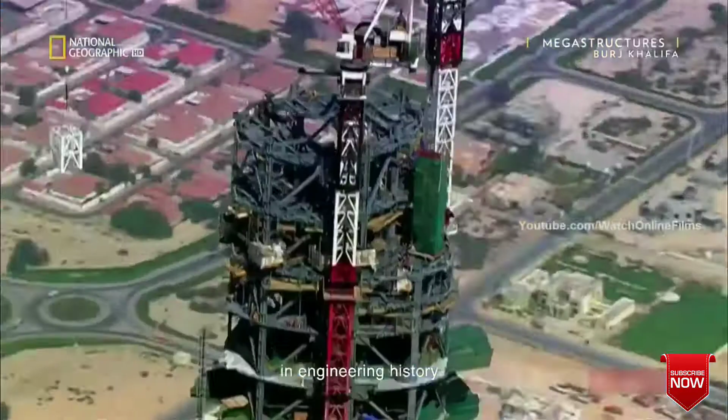The Burj Khalifa in Dubai is the tallest man-made feature on the face of the planet, and one of the greatest achievements in engineering history. To dream it up took outrageous ambition. To put it together requires nerves of steel. Constructing cranes taller, installing windows higher, and building bigger than ever before.

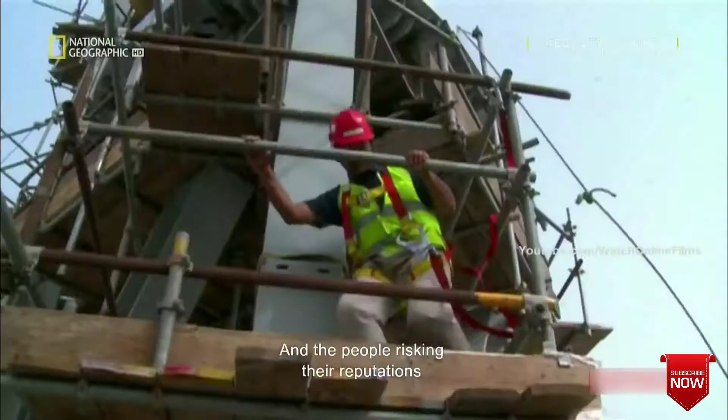The immediate reaction was, "Are you crazy?" As the construction team makes history, they film it themselves. This is the story of one incredible skyscraper, and the people risking their reputations and their lives to build it. All these people that are underneath this are at risk.

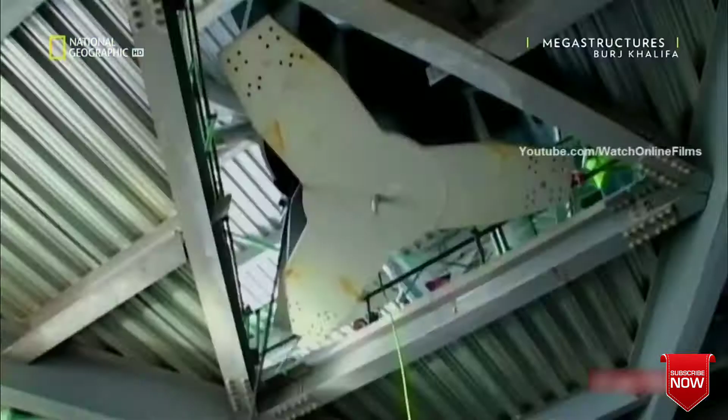In the Middle Eastern Emirate of Dubai stands an architectural giant. At 828 meters high, the Burj Khalifa is the tallest building on Earth. This $1.5 billion tower opened in 2010 with one of the most spectacular fireworks displays ever seen. But this patch of land once looked very different. 6 years earlier, when construction started, it was little more than a barren, parched, and sun-baked desert.

In February 2004, the team breaks ground at the Burj site. When you build this big, speed is of the essence. Time is money. There's so much money invested in these buildings, you have to finish them and start recouping your investment. Construction manager David Bradford is the man responsible for getting the job done on time.

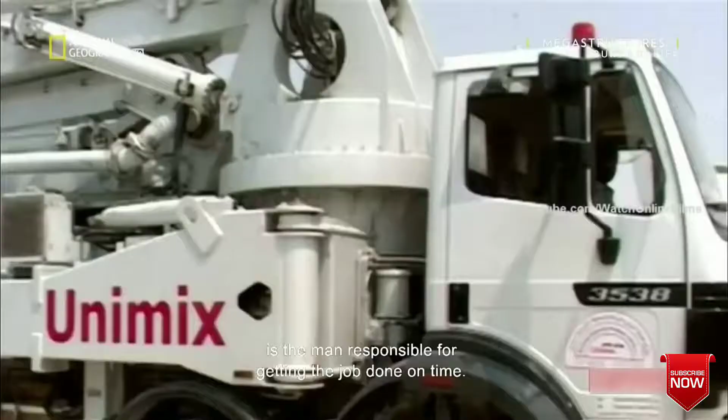So I was ecstatic, just to get a job like this. It's like a dream come true. This is the biggest building in the world. How many people get an opportunity to work on a job like this?

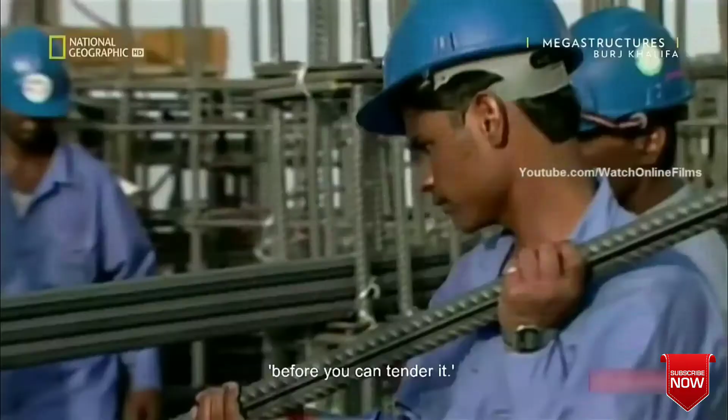But as David starts work, the architects are still finalizing the tower's complex design. The way you build a building like this, you have to fast track it. So you can't wait until you get all the design in place. You'll be sitting there in your office for 3 years trying to get the design finished before you can tender it. With large parts of the structure still on the drawing board, the construction team heads into the sky.

The fastest way to build a tower like the Burj is with reinforced concrete, using a process called jump forming. The team builds molds at the base. They insert steel reinforcement bars and pour in concrete. Then when the concrete sets, the team lifts the molds up to the next level. And the process starts again. Using this system, the building begins growing at the pace of one new floor every week.

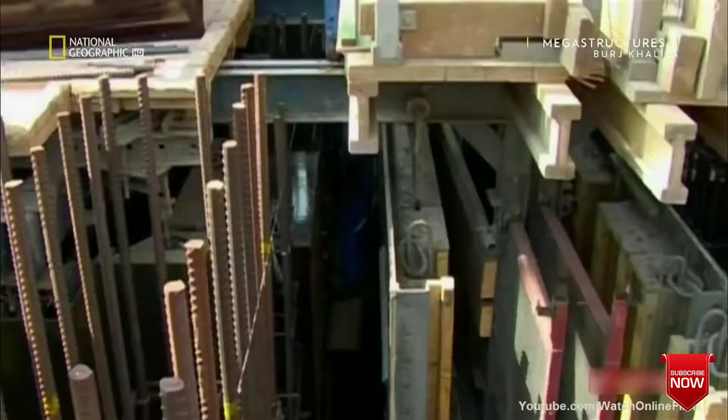When you set the jump form up like this, you put the rebar in, you pour the concrete on the top. After 12 hours, this is 12 hours after you place the concrete, which is liquid, you pull the forms back and you actually climb the hydraulic jump form system up on the concrete that was previously poured. And then that climbs up automatically 4 meters at a time.

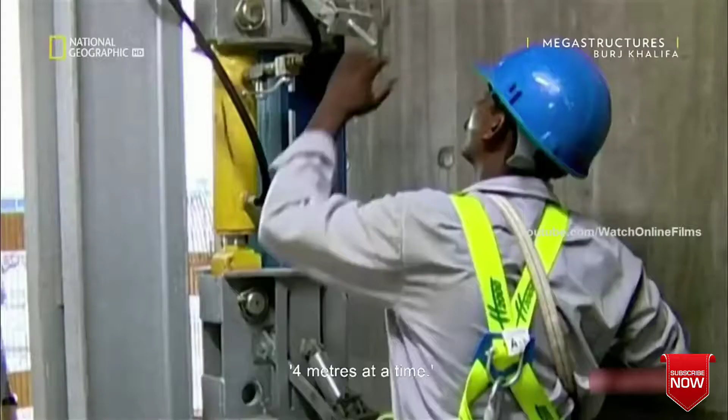The Burj Khalifa is the brainchild of Dubai property developer Emaar. They want to proclaim the city's growing status as a global financial center by building the world's tallest tower. So Emaar has called in one of America's top architecture firms, Skidmore, Owings and Merrill. SOM is based in Chicago, the home of the skyscraper.

As their chief engineer Bill Baker knows, building higher isn't simply a case of taking an old design and adding more floors. The added height creates a unique set of engineering challenges. We're on the 90th floor of the Willis Tower, formerly known as the Sears Tower. As you look out across Chicago skyline, you see almost a sampler of skyscraper technology. Over here is the Aon Center, which was formerly called the Standard Oil Building, and it's a single tube.

Each time architects go taller, they must invent new structural systems. If you look, the predecessor to the Sears Tower, the John Hancock Tower, it's called a braced tube. So you can see the diagonal bracing on each of the four sides ties all those columns together so that it acts as if it's one tube acting together.

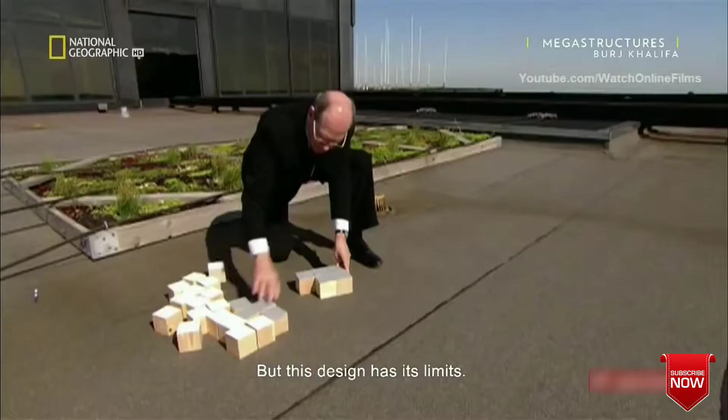But this design has its limits. These 9 tubes are sufficient for a building of this height, at 442 meters, but what if you wanted to go taller? Say you wanted to go up to over 700 meters. Well, you've got to make the footprint bigger. But as we do this, we've gone from something that was 3 wide to something that's 5 wide. So you have a huge amount of area, which is difficult to market. And what's more important is that the space becomes very, very deep.

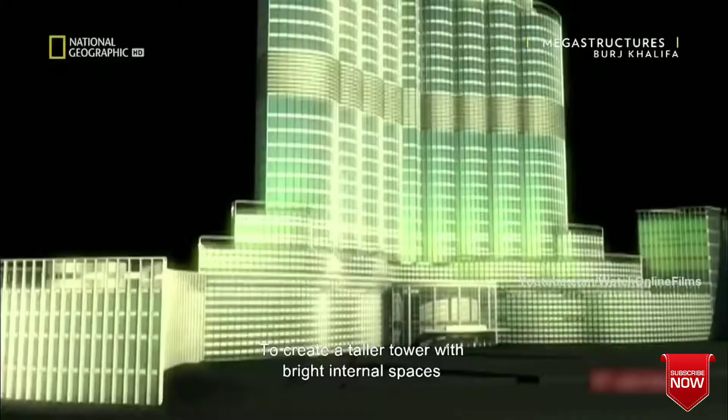In buildings, you want to have views. You want to be able to see out the window. And you can see your occupants would be so far from the views, from the skin, as to render the building unusable. To create a taller tower with bright internal spaces, Bill and his team devise a new structural system.

The structural system we use for the Burj Khalifa is the buttressed core. Now the core is the center hexagon in the middle of the building, and that's what's used to resist the twisting forces on the building, okay? But it's much too slender to go to such great heights. So it needs to be buttressed. Now the buttresses are the 3 wings that come off.

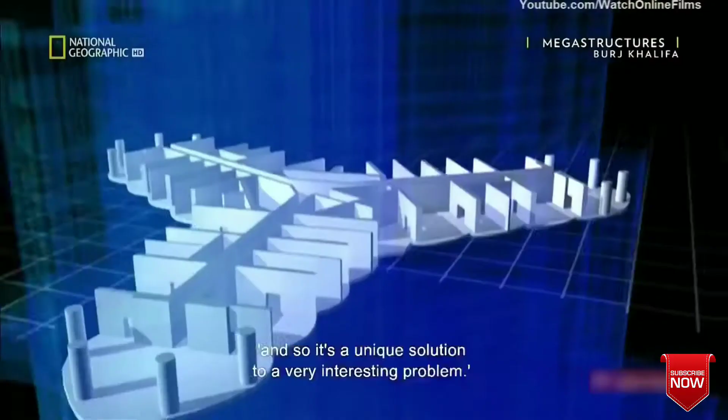It consists of these walls that go down the corridors. So you can see how this core has been buttressed in 3 directions. That's why the structure goes on the wings. To my knowledge, it's never been done anywhere else. And so it's a unique solution to a very interesting problem. With the buttressed core concept, natural light floods the interior.

We've come up with a solution which allows us to go very, very tall, but it's light and airy on the inside. It's as if you're in a 10-story building rather than a 160-story building. In SOM's design, the large tower base helps support the huge weight of steel and concrete. Then, as the building climbs, the buttresses step back in a rising spiral. The team then coats the design in glistening mirrored glass to reflect the desert heat and light.

If you were to compare the Burj to an automobile, you'd be talking about Lamborghinis or Ferraris. It's all about performance, and this building is at the highest level of performance. This quality comes at a price. The building cost was a closely guarded secret. We heard some general figures that were thrown out. We guessed that it was somewhere in the $1.5 billion range, but we weren't privy to a lot of that information. And again, I think the jury's still out.

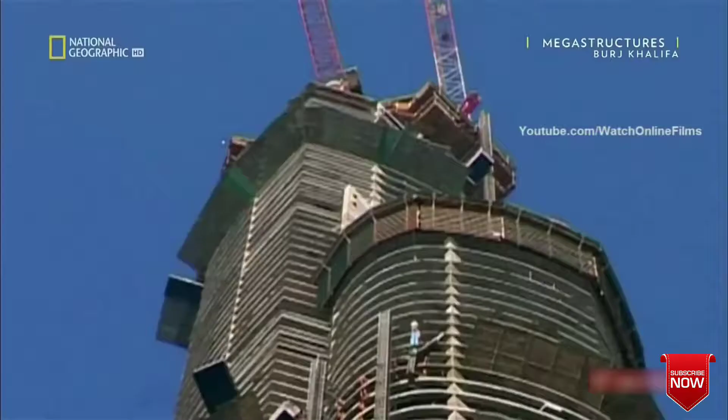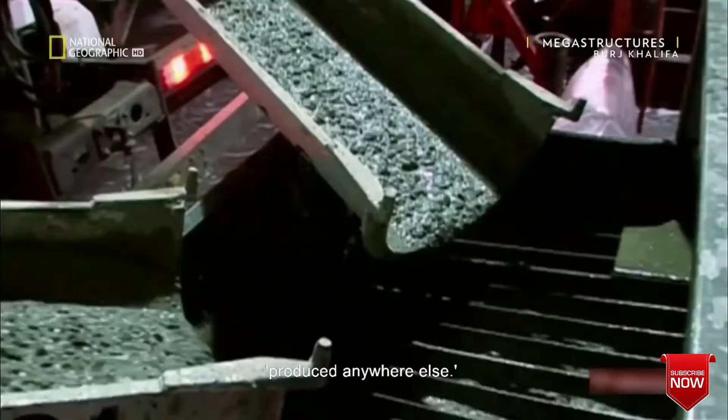Making this billion-dollar design a reality will be a mammoth task. The most basic construction materials must be super-powered. Strength of concrete was key here, absolutely key. And we produced concrete here that nobody produced anywhere else. The team uses over 25 separate ingredients to create concrete that stays liquid as it's pumped up the building and then turns solid extremely fast.

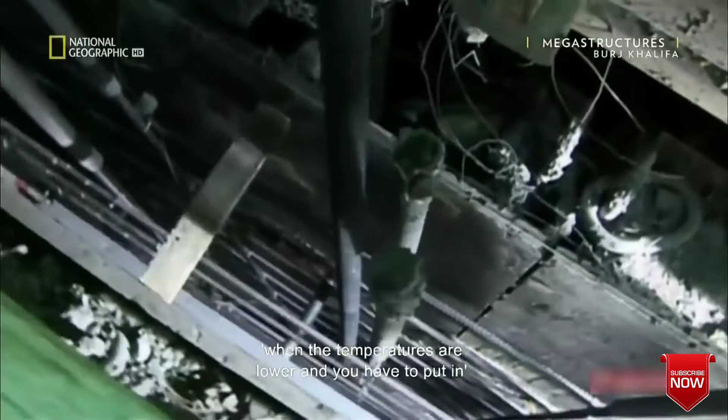But getting this special mix to set is a massive challenge in Dubai, with temperatures rising over 45 degrees Celsius. If the concrete is too hot, it'll set instantaneously and you can't even place it. You have to pour at night when the temperatures are lower, and you have to put in ice and chilled water in the concrete mix.

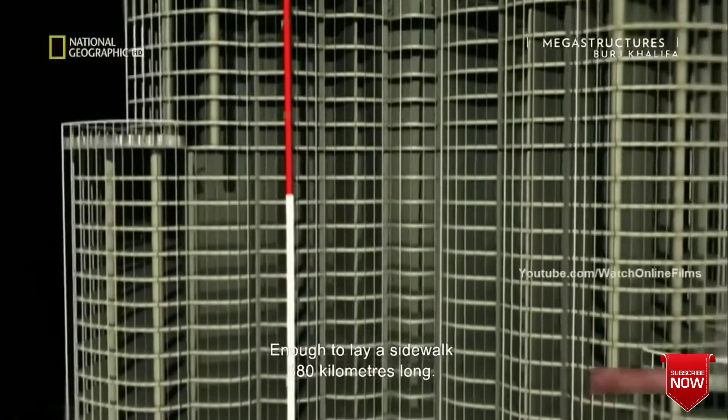To lift this mix up the building, the construction team uses 3 of the world's most powerful concrete pumps. Over 32 months, the pumps deliver 165,000 cubic meters of concrete, enough to lay a sidewalk 880 kilometers long. The team will then top the concrete tower with structural steel. And as this building rockets out of the desert, men and machinery will go to greater heights than ever seen before. Okay, over the edge.

The city of Dubai is home to 17 of the 100 highest skyscrapers on Earth. But they're about to be dwarfed by a monster. As construction accelerates, the Burj Khalifa is now growing a new floor every 3 days. The idea is keep the ball rolling, never stop construction at any point in the project until you're finished. The building's handed over, that's it. That's when you can relax.

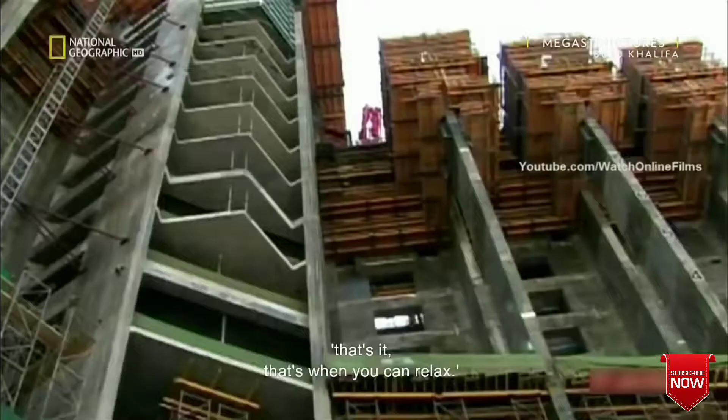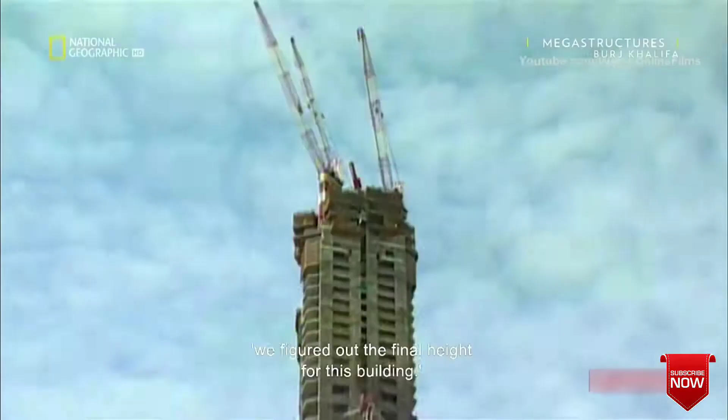While this process continues, there is still one fundamental detail to resolve. The architects still haven't decided on the building's final height. Usually minor things change, and on this one, major things changed. The foundations went in way before we figured out the final height of this building. It's an issue that has to be cleared up fast. The landmark to beat is the 508-meter tall Taipei 101 in Taiwan. SOM's original design is just 10 meters higher.

And one of the reasons why we did that is we didn't want to promise more than we knew we could deliver. But the architects soon calculate that the structure is so strong it could stand over 300 meters taller. We kept on making the building taller and taller. And so it actually grew to about 725 meters there for a while. It stayed there for a while, then eventually grew up to around 800 meters and finally ended up at the 828 meter height.

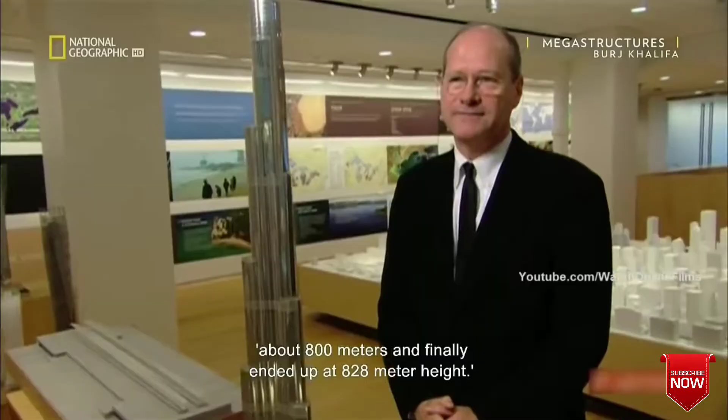When complete, the Burj will stand 828 meters above the ground. The question is, are the foundations strong enough to hold it up? Early on in construction, analysis of the ground under the site highlighted a problem.

It's not like when I worked in New York City, you get good granite there. You go down 4 or 5 meters, you're into good granite, and that's what you sit your foundation on, the granite itself. Here the ground is a top layer of sand, 3 or 4 meters of sand, and you get into weak sandstones, weak limestones, nothing very good.

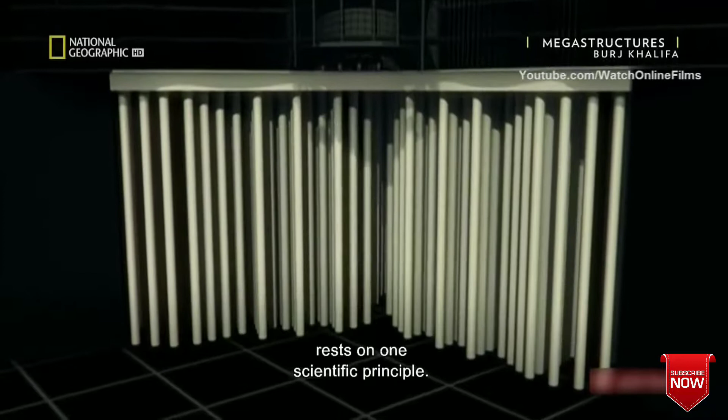But science provides the answer. The future of the Burj Khalifa and its entire colossal weight rests on one scientific principle: friction. There's basically 2 methods in piling. One is end-bearing piles, which is you put the pile directly on the hard rock. That's what can sustain the load.

But here we went with skin friction piles, where the weight of the tower is carried on the friction of the pile, the side of the pile. The foundations of the Burj rely on the super strong grip created between the ground and the sides of each pile.

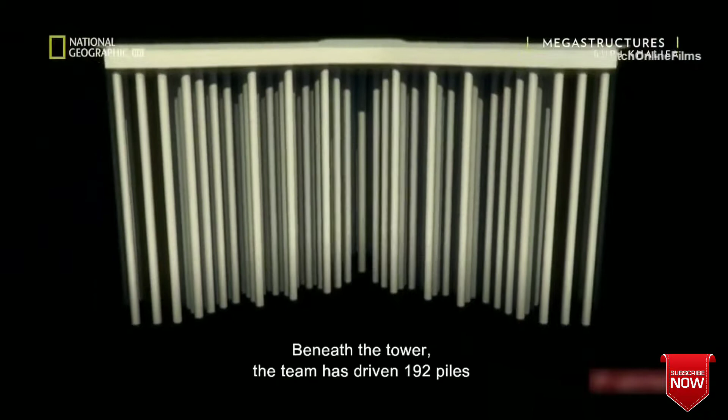Beneath the tower, the team has driven 192 piles to a depth of 50 meters to support a 3.7 meter thick raft of solid concrete. These foundations must hold up a building that weighs over 500,000 tons. The numbers are so big that the team has to allow for a small degree of settling in the design.

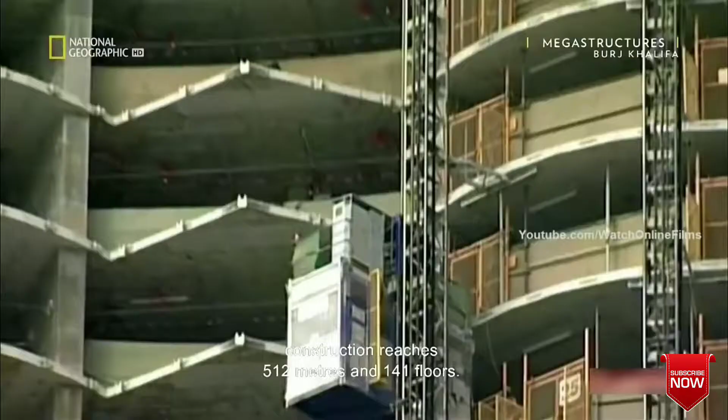Once we evaluate all the total load of the building, live and dead loads, we expect the foundations to settle about 75 millimeters. But the foundations should hold. 3 years after breaking ground, construction reaches 512 meters and 141 floors. The Burj is now the tallest building on Earth.

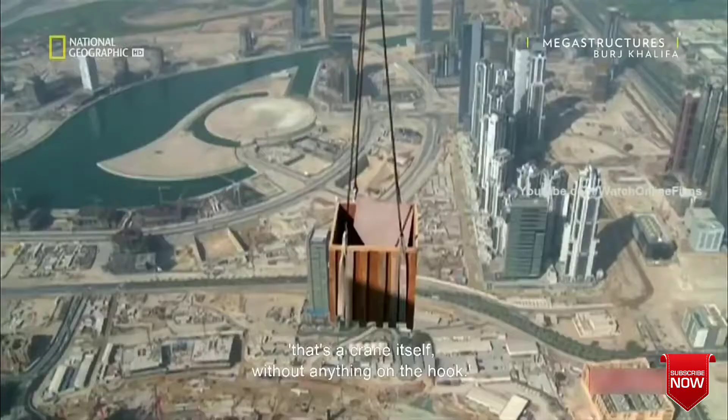To help move materials, the team hires 3 of the biggest construction cranes in the world. I mean, these are very specialist cranes, actually huge. They weigh 120 tons dead weight. That's the crane itself, without anything on the hook. The high wire act of installing the cranes falls to a special group of men. Sharif and his team of crane riggers.

These men come from every part of the globe, and many speak different languages. But they have 2 things in common: a strong nerve and an incredible head for heights. Their task is to erect the cranes and keep them working smoothly. All without a single slip. They never ever lost sight of the ground and the edge of the building, and it was amazing that these people were so comfortable.

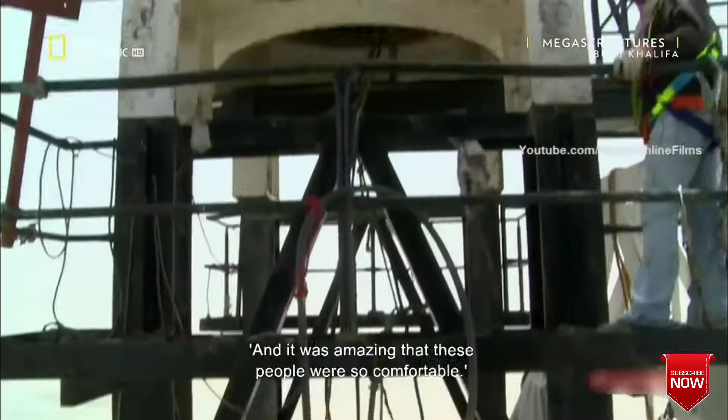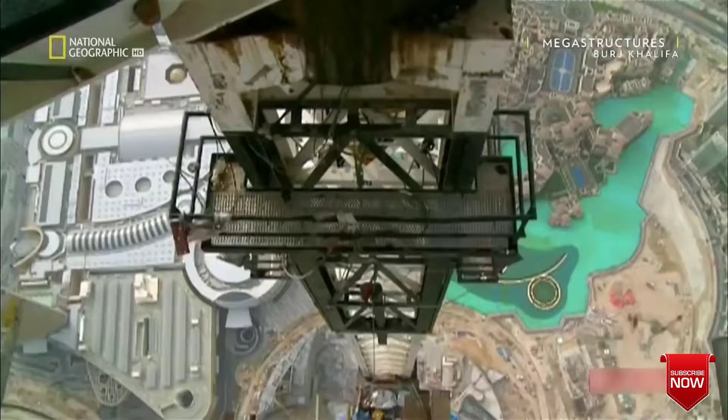The cranes contain an ingenious self-jacking mechanism, so they can grow alongside the rising building. As every new floor is completed, Sharif and his team add another section to the tower support and lift each crane even higher. You need a steady hand to operate the highest construction crane in the world. And one of the few trusted with the task is Mohammed from Pakistan.

I'm on duty for 12 hours, from 7 in the morning until 7 in the evening. There was a myth going around that the crane operator lived in the cabin, but I think the cabins are too cramped and uncomfortable. At 700 meters up in the air, Mohammed's crane cab is nearly twice as high as the Empire State Building. I like heights. They're great for work. If I need to go higher, that's fine. Whatever the height is, God willing, I'll do it.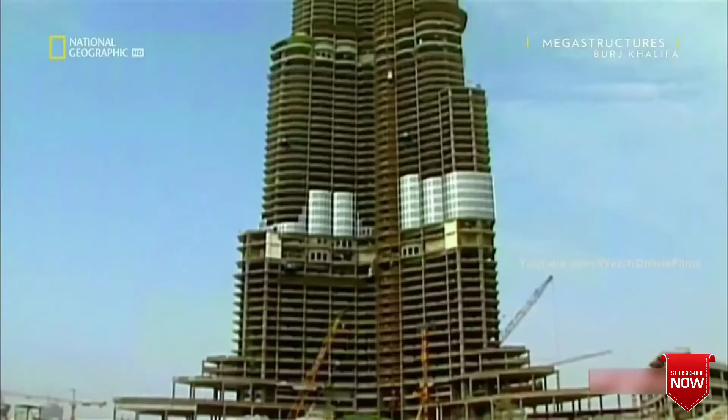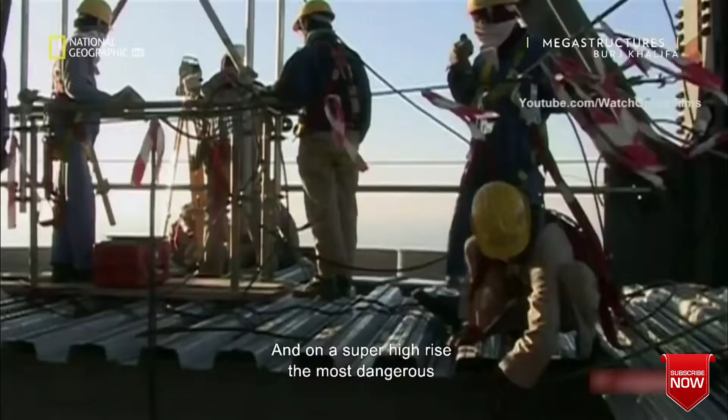As the Burj reaches for the sky, it is entering the unknown. And one powerful force is becoming an increasing threat. The first overarching thing is you have to be respectful of the laws of nature, with gravity, wind, and the sun. And on a super high rise, the most dangerous and unpredictable of these elements is wind.

And when you get to these heights, the dominant load is actually wind load. It's not dead load, which is the weight of the structure and the cladding and so forth. It's not live load, which is the people in the building. That's fairly small. It's actually wind load. You get the wind blowing on the side of the tower, and of course it tends to bend the tower or try to push it over.

No building demonstrates this problem better than the John Hancock Tower in Boston. A masterpiece of steel and glass, 240 meters tall, the Hancock was constructed in the 1970s. But serious problems soon emerged. Even in moderate winds, people inside suffered motion sickness as the building swayed. And over 5,000 glass panels blew out, shattering on the sidewalk below. Only a major redesign saved the tower from demolition.

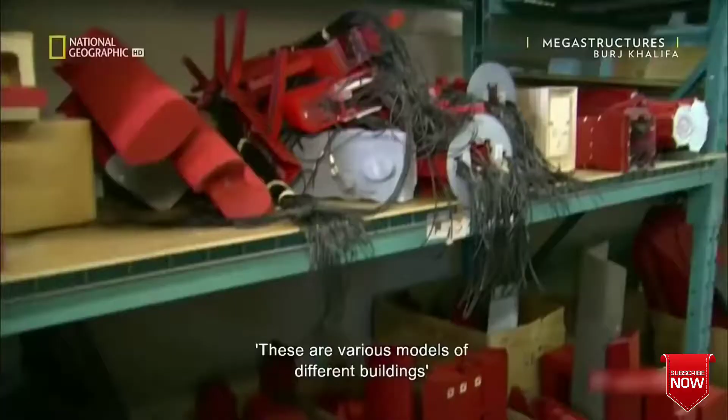To prevent the Burj from suffering a similar fate, the team tests the building in a wind tunnel. Peter Irwin is one of the world's top wind engineers. These are various models of different buildings that we've tested in the past. This one here shows some of the unusual shapes that architects are coming up with. That one's being built in China.

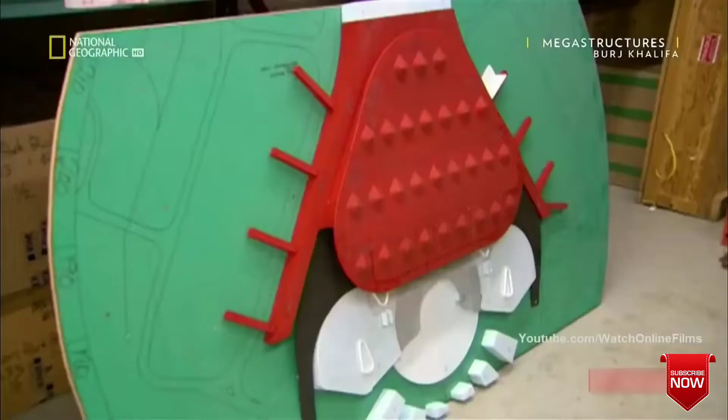When we get involved with a wind engineering project, there are two aspects that we need to address. First of all, we need to know what the winds are doing in the area where the building is going to be built. Then we also need to know what it is going to do to the building. Peter and the team calculate that the Burj has to withstand gusts of up to 240 kilometers per hour.

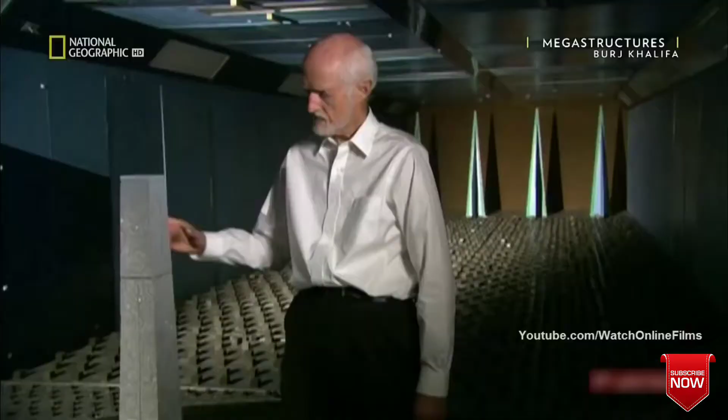But because of its height, this tower faces an added danger. Buildings, as they get taller and more slender, run into a particular phenomenon in wind called vortex shedding. This is a model of a tall building, and the wind is blowing this way. What happens with a building like this is that you get vortices peeling off this front corner, first off one side and then off the other side. As these whirlwinds peel off each side of a skyscraper, they can pull the building violently from side to side. Peter and the team must make sure that this phenomenon doesn't damage the Burj.

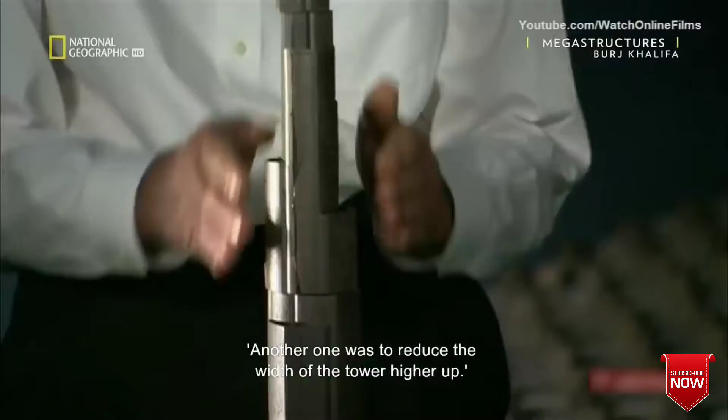There were three aerodynamic improvements that were developed as a result of the wind tunnel test. One of them was to improve the shape of these outer buttresses by softening the corner here. Another one was to reduce the width of the tower higher up. And a third improvement was achieved by reorienting the entire tower relative to the prevailing wind directions. The end result is an incredibly stable building, with a shape that resists vortex shedding. So you might say that this shape confuses the wind and it's unable to create these strong crosswind forces that affect many other buildings. The Burj is equipped to handle the strongest winds that strike Dubai.

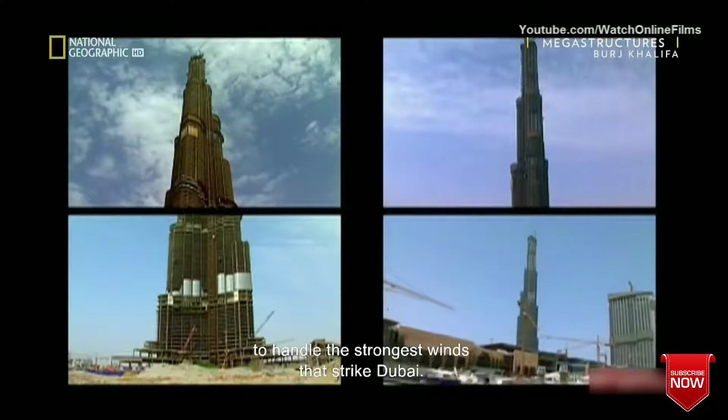On site, the superstructure is shooting upwards. Once completed, the Burj Khalifa will contain 900 apartments, a 160-room hotel, and 37 floors of offices. The building will use up to 36 megawatts of electricity, enough to power a town of 20,000 people. In a power outage, five huge generators will supply backup electricity. But first, someone has to get these massive machines into position.

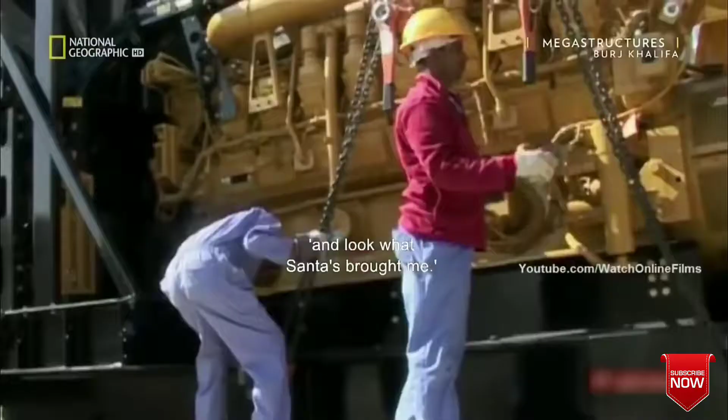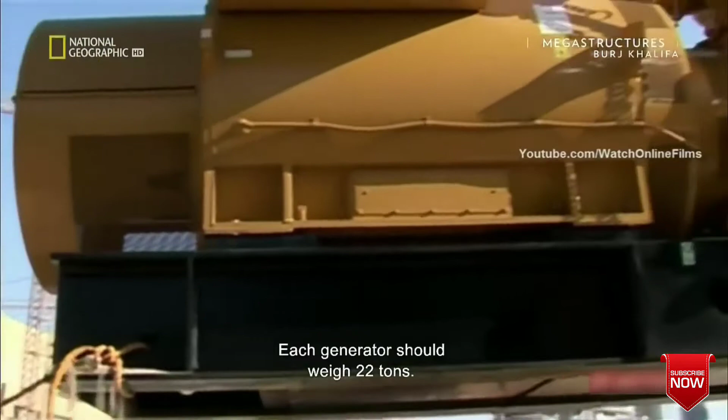Three days before Christmas Day, and look what Santa's brought me. That's a 22-ton generator, and there's five of them. Pull it. Gently. Keep your eyes on the machine. What have we got? 26. It's supposed to be 22. Someone, somewhere, has made a critical mistake. Each generator should weigh 22 tons. Why is it 26 tons?

Everything is rated below 25 tons. The spreader beam is rated until 25 tons. All these slings, they're 6 tons each, that's 24 tons, and we're trying to lift 26 tons. Therefore, all these people that are underneath this are at risk. Right now, my people are at risk. It's 26 tons. The generator is 4 tons too heavy, and the chains could snap at any moment.

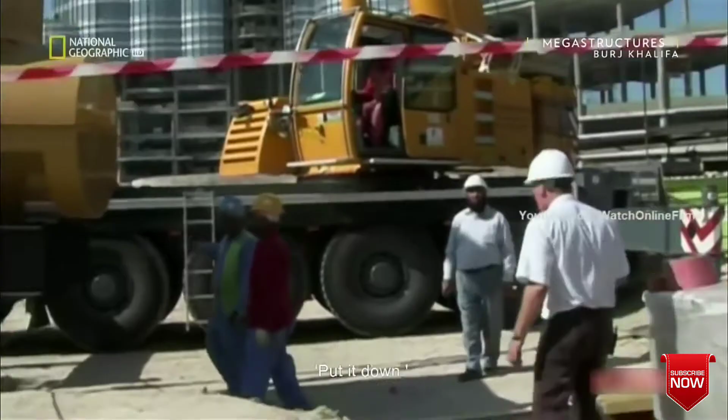Put it down. These things are not an exact science. It's experience, and I'd sooner not risk the lives of men or machines. When you're building on this scale, safety is paramount. The team must reinforce the lifting gear before moving the generators into the building. You go downside, huh?

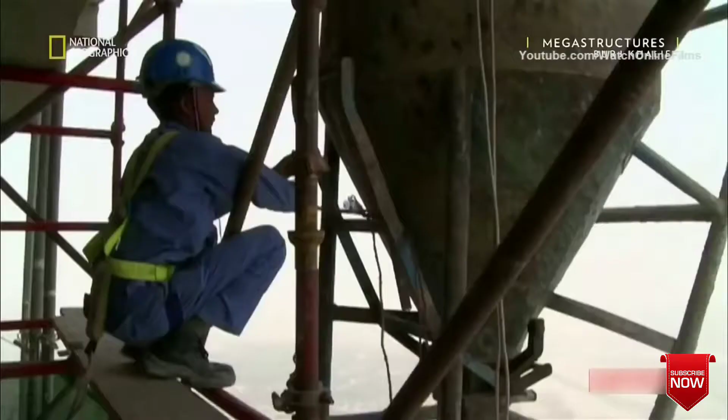As work progresses, the task of keeping everything on schedule is taking its toll on David Bradford. I went all out here to produce the best job possible. That had an impact, obviously, on my family life. My wife didn't see me, although she didn't complain about it, but I'd show up home and my wife had already gone to bed, and I'd be out in the morning before she got up. But the job's just about to get even tougher.

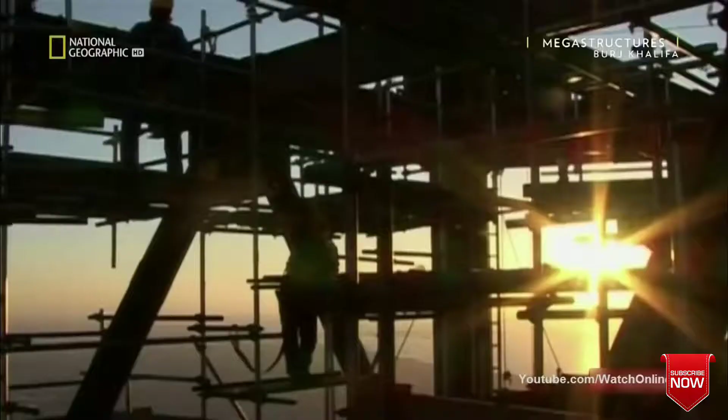It's the kind of building where you can't afford to make mistakes. That's the bottom line. You make a mistake, the building stops, then everybody incurs huge costs. The contractor's got all his plant and equipment lying idle. He's got thousands of workmen out of work, basically. Can't afford mistakes. You have to check, double check. Everything has to be more or less perfect, all the way up the building. And with the superstructure almost done, one thing is less than perfect. The glass panels that should already cover most of the building are still nowhere in sight.

As the finished shape of the Burj Khalifa begins to emerge from Dubai's desert haze, the team urgently needs to start cladding the building in its steel and glass facade. As the construction drives upward, you need the cladding to enclose the building, create an interior environment where you can actually work inside and do fit-out and mechanical work. All the kinds of things that make the building habitable need an enclosure. It is a massive task to seal the structure from wind, rain and sand.

24,348 individual panels must be assembled and installed on the exterior. But the company commissioned to supply the panels has gone bust. Now the building is in danger of going over schedule and over budget. Every idle day, every decision that is not made, costs somebody a lot of money. Local contractor Arabian Aluminium brings a new panel supplier on board. And they track down a problem solver to kick-start the operation.

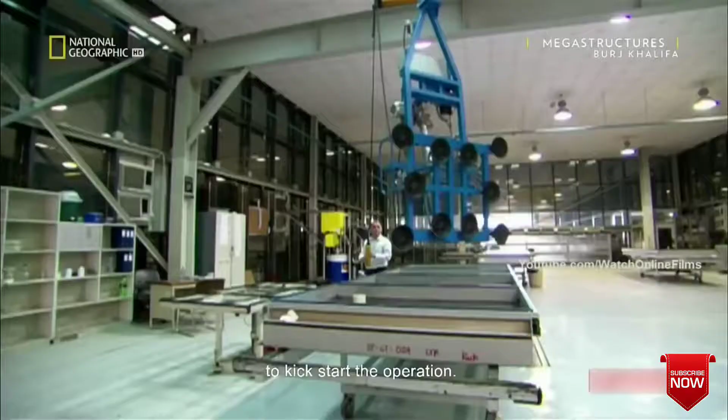I hopped on a plane, arrived in Dubai for the interview and was taken to the job site. And he said, well, this is the job and this is what you're going to be doing. And I looked up and I said, wow. He goes, yeah, it's not even halfway there. So big surprise. And I said, well, where's the windows? He said, well, this is a problem. There is no curtain walling. There's no design. We don't have a system. I said, well, this is a job for me then. I can fix this problem.

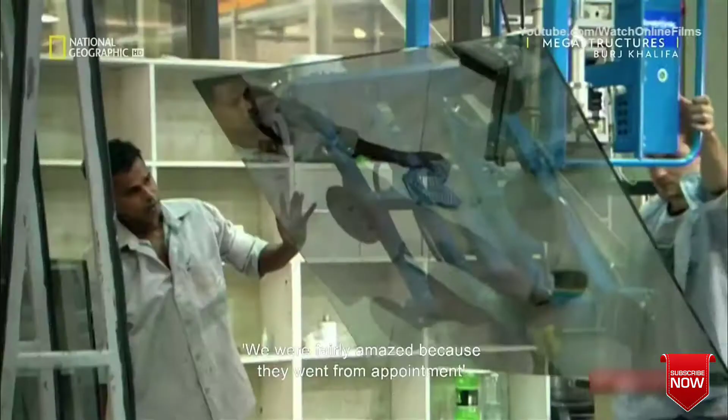Construction of the facade is now 18 months behind schedule. To put the build back on track, John Zarafa helped set up a brand new factory devoted entirely to the Burj. I thought, yeah, it's going to be difficult, but it's a challenge. We were fairly amazed because they went from appointment of their new contract through design, through production of the components and ready for the testing in a space of 4 months.

This is a typical panel that was used on the Burj, basically with a big piece of vision glass, small vision glass, stainless steel spandrel, vertical bullnose. It's a stainless steel fin, it's mirror finish, which at the moment has got protection on it, which will eventually get taken off. These panels are literally lifted up as a complete unit and they're hung. That's why they call it a curtain wall. It's actually hanging from the slab above.

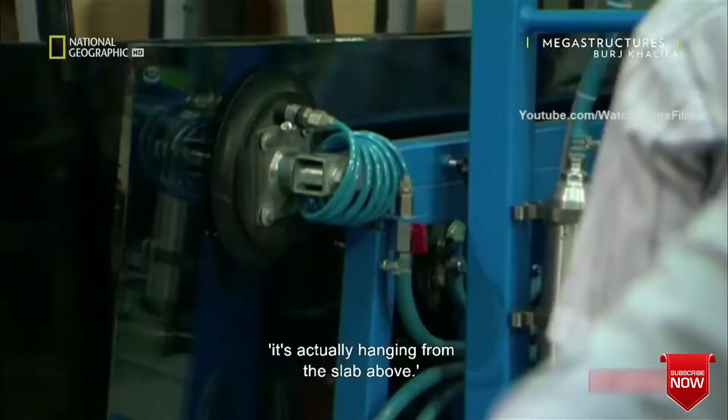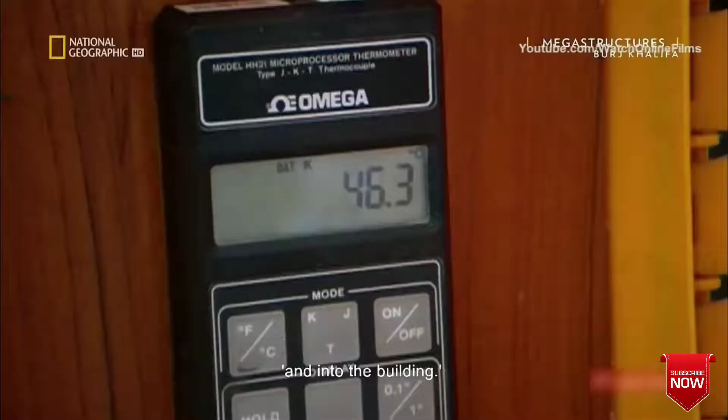Covering buildings in glass might look good, but in Dubai, this creates a special challenge, as John demonstrates. We've got a piece of clear glass here, just normal glass. The sensors are measuring the temperature in the box to understand how much heat is transferring through the glass and into the box. So if this was on the building, this is the amount of heat that would transfer through the glass and into the building. The outside temperature is now reading 46 degrees Celsius, which is very, very hot. As you can see, we're having a bit of a sweat.

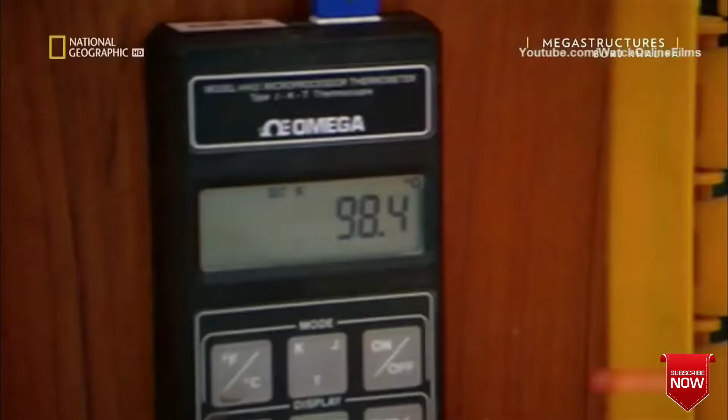46 degrees Celsius is high, but that's nothing compared to the temperature under the glass. The current temperature inside the clear glass box is reading 98 degrees Celsius, so not too many human beings that I know could actually live in this environment. The internal temperature is just below boiling point. If this ordinary glass were installed in the Burj, the building's interior could become the world's biggest sauna. But the team has a high-tech solution.

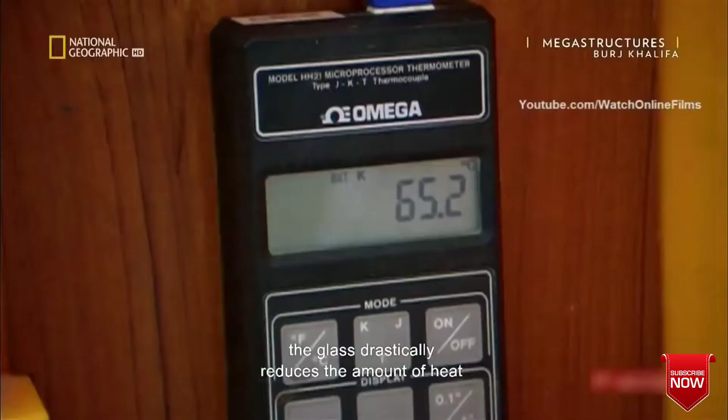Here we've got the glass for the Burj Khalifa, which has 2 coatings on it. The outside coating is a silver coating, which captures the UV rays and reflects them back out of the building. The inside coating is a titanium coating, which captures the infrared rays. By reflecting infrared and UV rays, the glass drastically reduces the amount of heat that penetrates the building.

But this technology comes at a cost. With everything that is involved with making a panel, to the point of bringing it to the site and installing it, you're probably talking close to $2,000 US a panel, times 24,000 panels, it's a lot of money. So 24,000 times 2,000 is 48 million. As the glass and aluminium arrive in Dubai, factory workers assemble the panels and ship them straight to the building site.

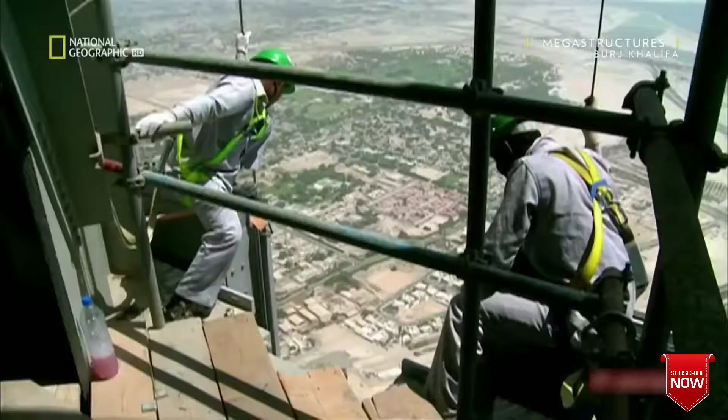The panels are up to 6.4 meters long and weigh up to 750 kilograms. And every single one must be lifted individually and installed by hand. It's very dangerous. You can imagine these panels are quite large, and as soon as the wind grabs them, they're like a big sail, so very difficult to control. The panel could go flying back into the building, the glass would break, and you're going to get a shower of glass coming down the building. A guy could get his legs cut open and stuff like that. It's quite dangerous.

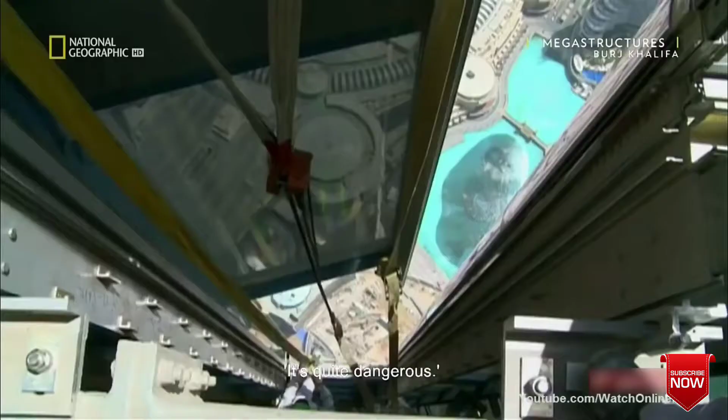As the workmen seal the building, no one is following progress closer than construction manager David Bradford. The major milestone, believe me, I've been working on this thing for a year now. It's been a nightmare. On a Friday, if I wasn't coming into work, I'd set my telescope up on the roof and spy on the cladding contractor and make sure he was working. If he wasn't, I'd give him a telephone call. Yeah, hey, what happened? You know, why aren't you working?

We actually recovered all the time that we needed to get the building back on track, which was really astounding that they were able to do this. The curtain wall is virtually finished. 5 years after breaking ground, the Burj is racing towards completion. On the outside of the building, one of its signature features is taking shape. The highest external balconies in the world.

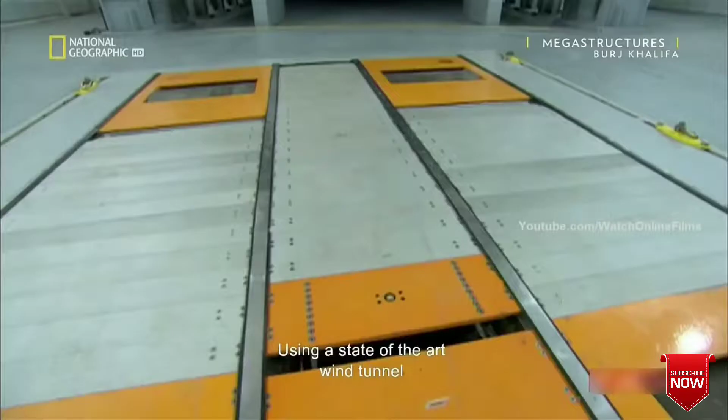It was a client suggestion, and my first thought was, you better bolt down the furniture. We'll head into the main control room. Wind engineer Peter Irwin has a simple way of demonstrating the problem, using a state-of-the-art wind tunnel at the University of Western Ontario, run by engineer John Comar. The air is streaming through this side. It contracts right through this nozzle in a very uniform fashion and streams right into that corner number 1.

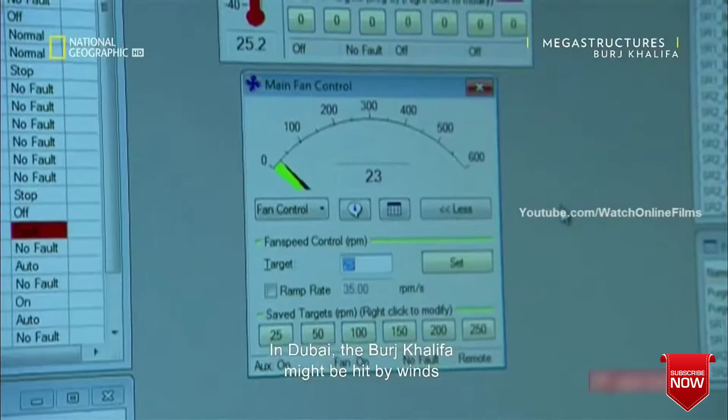Okay. What we want to do today is to look at the effect of wind on people. We will presumably be able to have them harnessed down to be safe. We'll certainly strap them down and get them linked to the floor so they don't blow away. In Dubai, the Burj Khalifa might be hit by winds gusting up to 240 kilometers per hour. And this demonstration will show the effect of high winds if an ordinary person was standing on an unprotected balcony.

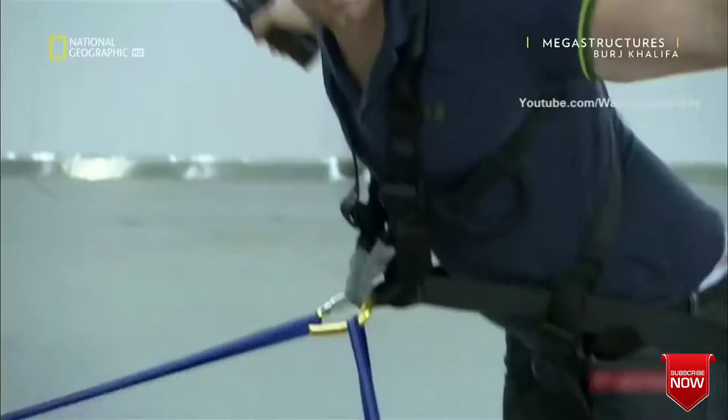Okay, we're turning on the wind, Simon. It's going to go up to 70 miles an hour, so get ready. Okay. ...to 80 in case you run into trouble. 130 kilometers per hour is equivalent to a Category 1 hurricane. Could you try and take 1 or 2 steps forward? Okay, thank you. That's enough. I wouldn't like to be on a balcony in that kind of wind at 120 stories.

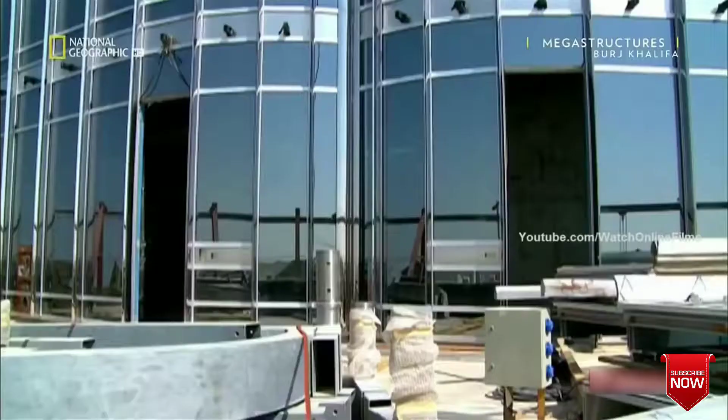To prevent people being blown off the Burj Khalifa, the architects developed ways to protect balcony users from the wind. We came up with these glazed balustrades which keep the wind from blowing straight through across the balcony terraces. We came up with these architectural dividers which keep the wind from coming over the balustrades and sweeping across the surface of the terraces. And we created these trellises which stop the downdrafts from pushing down over the tops of each terrace. But inside is the most ingenious solution.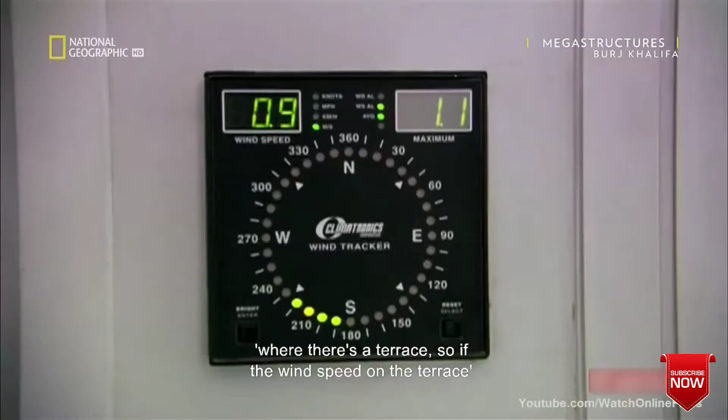Well, we have wind alarms installed on every facade where there's a terrace. So if the wind speed on the terrace exceeds what we consider to be safe for the occupants, there will be an alarm that goes off to warn people not to use the terrace at that particular moment. Meanwhile, further up, the building has yet to reach its final height. The construction team must crown the structure with one of the most extraordinary pieces of engineering ever attempted. A 136-meter tall steel pipe, weighing over 350 tons and measuring just 1.2 meters across at the very top.

The spire, to us, seemed to be the culmination of the building. How do you take this tapering tower and end it? If you chopped it off, it would look truncated. So we thought it had to stretch all the way up into the sky. But there's a huge problem. How to lift the spire and place it on top of the building. The thing is that we couldn't get the crane high enough up to set the spire. Even with the crane at maximum boom height, it couldn't get anywhere near the top of the spire.

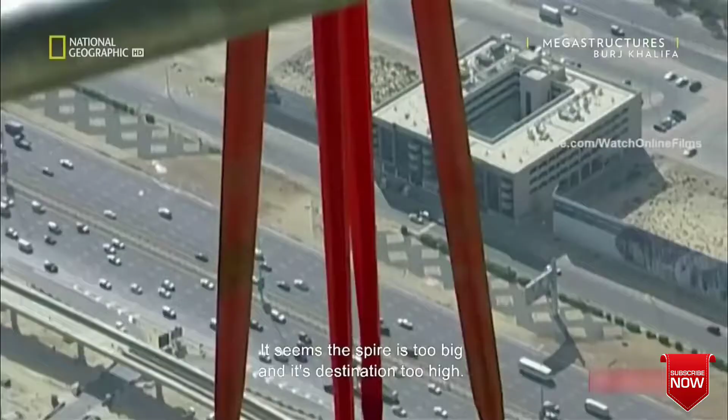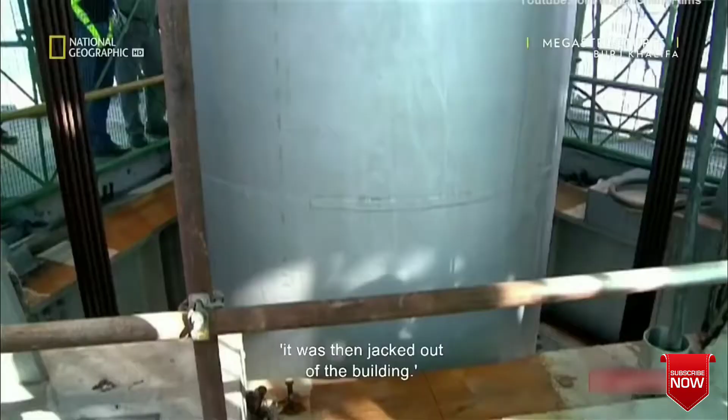No crane in the world can handle this job, and no helicopter can lift 350 tons of steel. It seems the spire is too big, and its destination too high. But then, an engineer suggests an ingenious solution. Lift the spire in pieces and assemble it inside the building. The spire was basically constructed inside the shaft of the building, and then using strand jacks, it was then jacked out of the building. All the lead architects and engineers gather to see the spire rise into its final position. Here we are for the last jacking of the spire to take it up to the top.

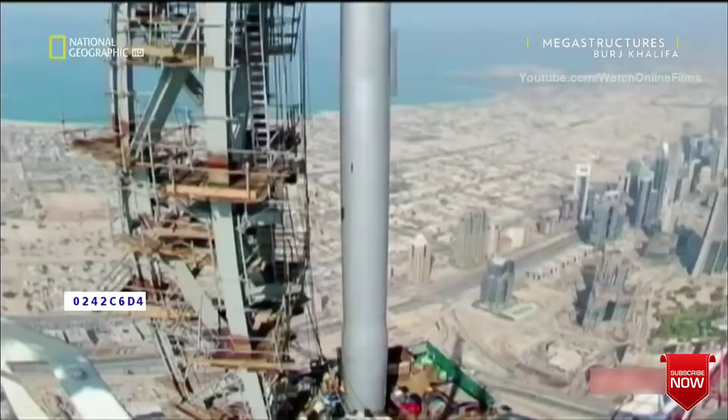It's a pretty nice moment to see this happen. For the first time, the silhouette of the Burj is complete. The team can now start to apply the finishing touches. This building doesn't just have to be the tallest in the world, it also has to be the best. And to make sure it's just that, some brave men are about to go to extraordinary heights. It's a long way down here. That's it. Long, long way down.

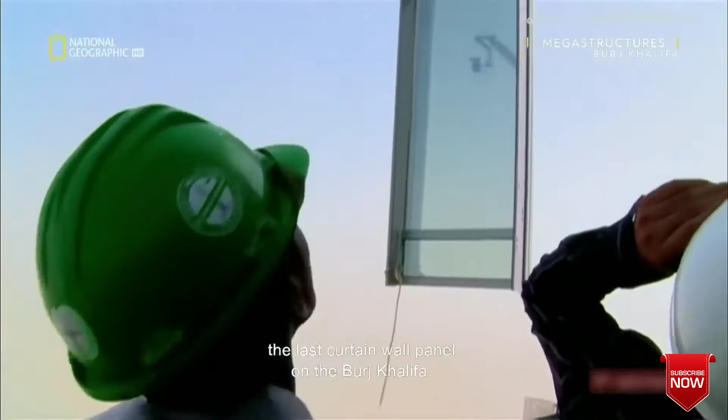After an incredible team effort, workers are finally installing the last curtain wall panel on the Burj Khalifa. The key to the job was the planning. We planned that whole thing down to the millimeter, down to the second. The race is now on to finish the building before it opens in 3 months.

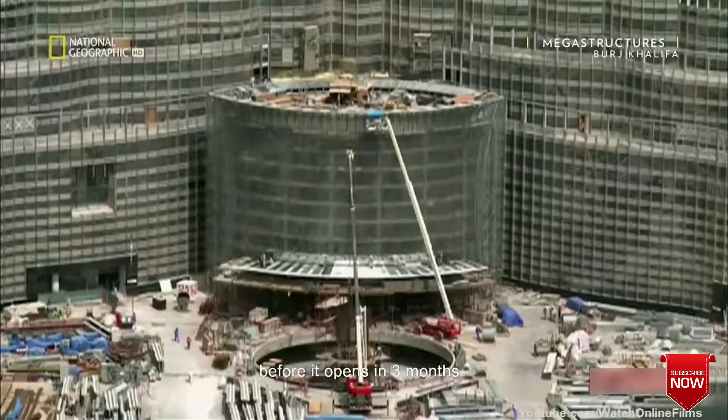After 6 years of construction, it's covered in dirt and dust. But there's a simple solution. Teams of window cleaners will polish the entire facade by hand and rope. All 24,348 panels. 800 meters up, there's one more job. After dark, the entire building will be illuminated by thousands of decorative lights. But at the tip of the spire, the last 7 lights still need to be installed.

The scope of work was to cut 7 holes into the existing spire. If it was me, I probably would have said, out of 2,000 lights, 7, forget about it. Standing on the ground, you're not going to notice. But Emaar wanted to do this job 100%. You know, they set their targets very high. The construction team must find a way to finish the job. You couldn't get a scaffold up there. The crane couldn't get that high.

Rope access expert Mick Flaherty has the answer. The immediate reaction was, are you crazy? How do you intend on doing this by hanging on a rope? Mick recruits a highly trained supervisor to lead the job. Now this is an abseiler. This is a guy that's worked in the rope access industry for many years.

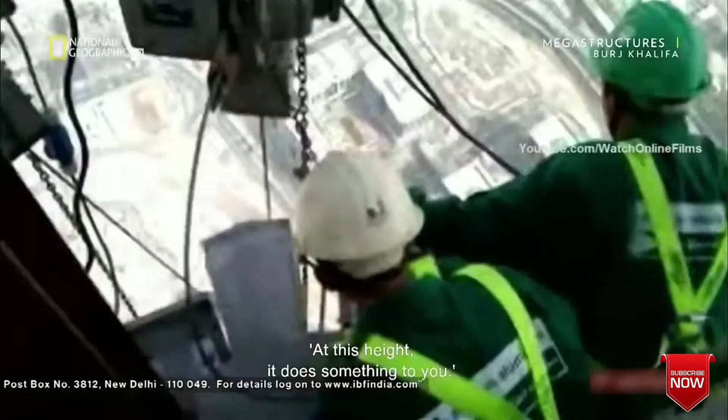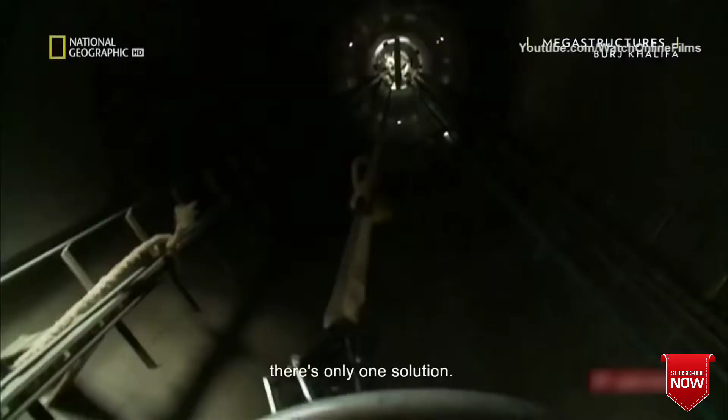But just before they're due to start, disaster strikes. At this height, it does something to you. You know, you're totally out of your limits. Making our way into the spire, I could see it in his eyes. He was concerned. He went white. He stops and he says, I'm sorry. I says, what's wrong? He says, I don't want to put my own life at risk. I can't do this job. With no time left to find a replacement, there's only one solution. Mick has to lead the job himself.

It's a highly dangerous task, in some of the toughest conditions imaginable. For me, it was the heat. It was the environment here in Dubai. It was a heavy construction job in an extreme environment. It's too dangerous and inaccessible for a TV crew. But Mick films it himself. First, inside the spire, the team cuts 7 holes in the 55mm thick steel.

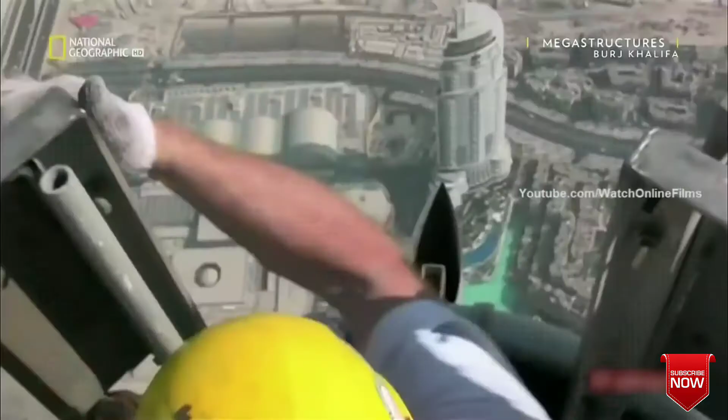He's going to get into position now. Then, Mick has to seal the lights in place from the outside. We got to the top of the spire and I rigged the job up and threw the rope, making sure I had knots on the end of them. This one's a serious one. Very serious. You're all ready now? All ready, sir. Okay, over the edge. It's a long way down here. Yes, sir. A long, long way down.

You feel so high, you know? It doesn't feel real. Okay, Jamil? Yes, sir. All okay, sir. All right. Keep it there. That initial going over the side and doing the abseil, it was just a mega buzz. It was like, shall I look down or not? We've been cutting the hole in the steel. We've then been installing the light housing. And now we're going to finish by sealing. Automatic, yeah? Yes, sir. So that is the job complete.

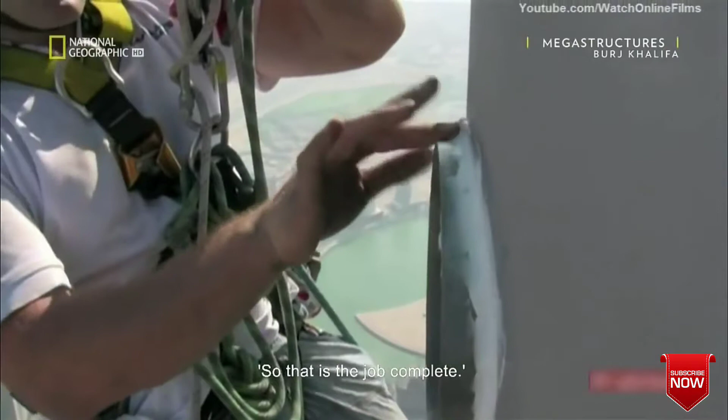These guys, they have bodies of steel. Isn't that right, guys? Yeah. See? This is what it's all about. Appreciating your job.

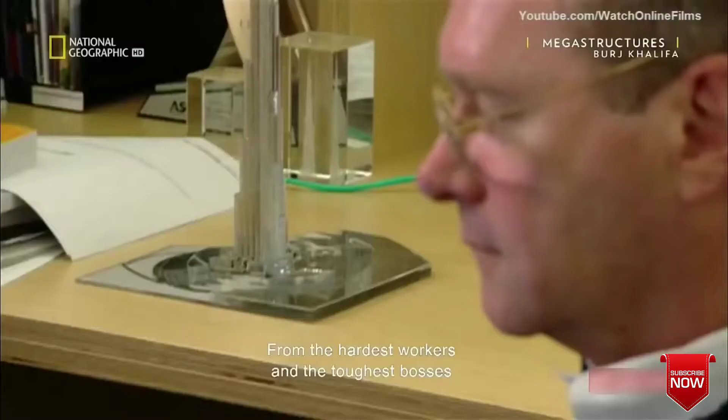The Burj Khalifa finally opens to the world in January 2010. Standing 828 meters high, it is the world's tallest tower by over 300 meters. Creating it took the combined effort of tens of thousands of people. From the hardest workers and the toughest bosses, to some of the brightest minds in the architectural world.

It was a great feeling to get the job. It was even a better feeling to finish it. And you can see the result over there. I mean, it really is a fantastic building. Okay, done.